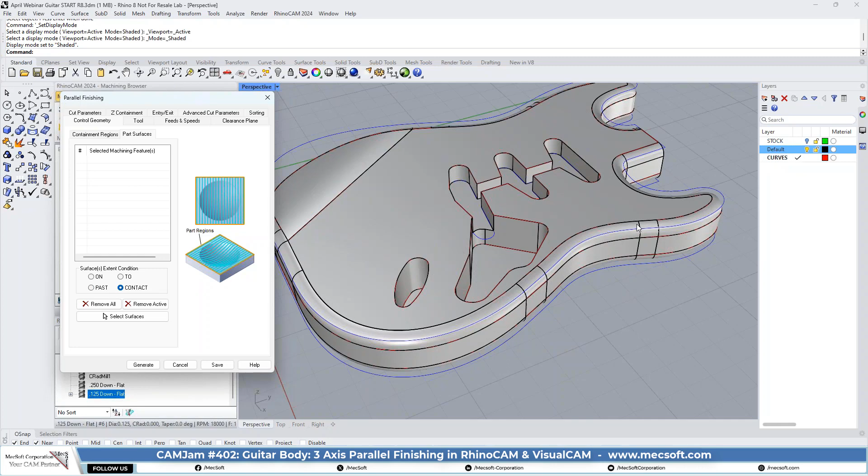This is a new option in 2024, which is going to make finishing these outer fillets a lot better. So the tool is going to actually complete this cut all the way down to the tangent line. If you recall from our previous versions, the tool in parallel finishing would stop when the tool aligned itself with this boundary, so it wouldn't go all the way down. So in this case, we have this new option that takes care of that. So we're going to use this contact condition.

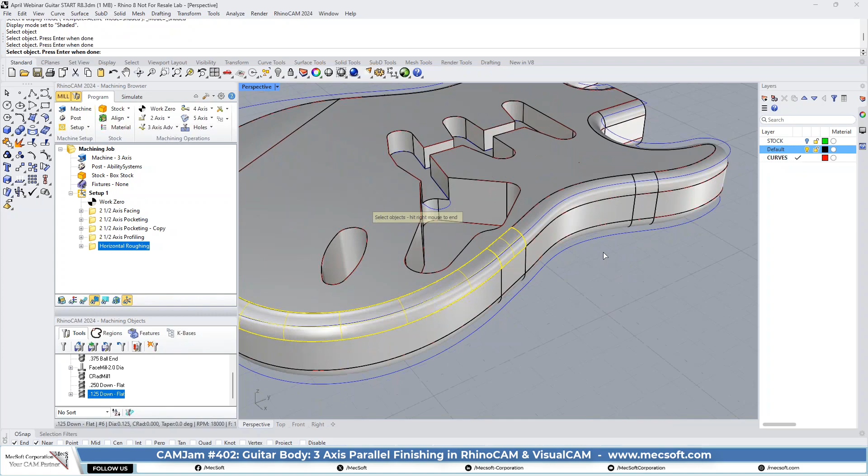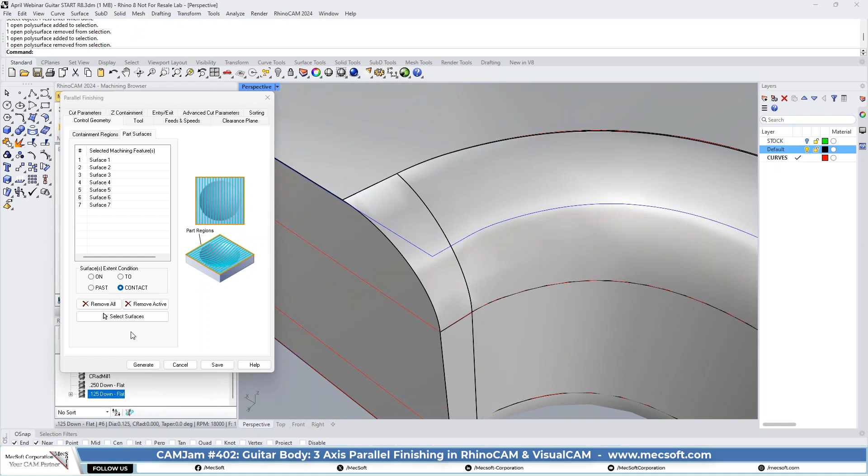We're going to go ahead and select these surfaces. We'll just start working our way around. Oh, sorry about that. Not sure why it didn't pick that. Okay, gotta keep going then. Okay, just work our way around here. And we want to do this as well. Okay, so we got all of our surfaces selected.

And for the tool, we're going to be using the 3/8 inch ball mill. And for cut parameters, 1/1000th tolerance, mixed cut direction. All these we're just going to use the default parameters. We'll use a tighter step over. We're not going to use as tight a step over as you would normally use for a good surface finish. We're just going to do a step over that makes it relatively quick to generate. So let's just put, say, 0.01.

And for the Z containment, we don't really need to do anything here. We will fit arcs. Okay, and let's generate that. It will take a little bit longer because we're calculating this contact condition around the boundaries. Normally the parallel finishing is relatively quick, but this time it's going to take a little bit longer to calculate that. And you might be able to hear the computer fan running to cool that processor.

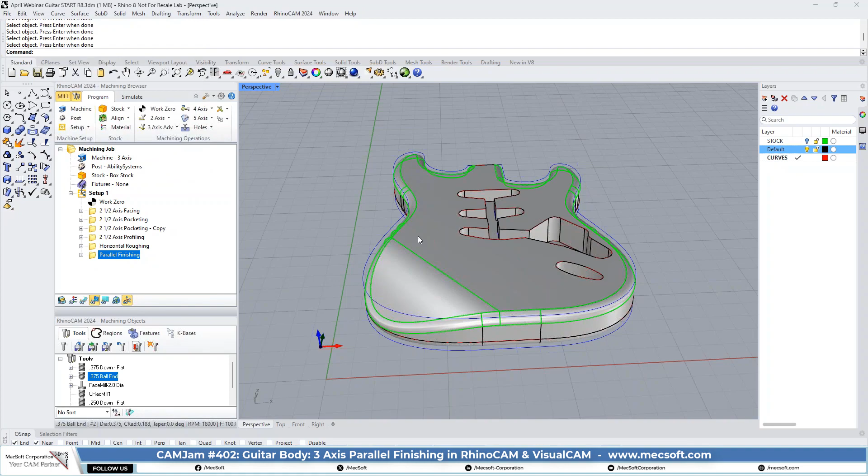So it looks like we got done here. So here is the parallel finishing. And what is really cool is that it covered the entire fillet all the way down to this contact point. So in the previous versions, the toolpath would stop when the tool was aligned vertically with this boundary, which means it didn't go all the way down.

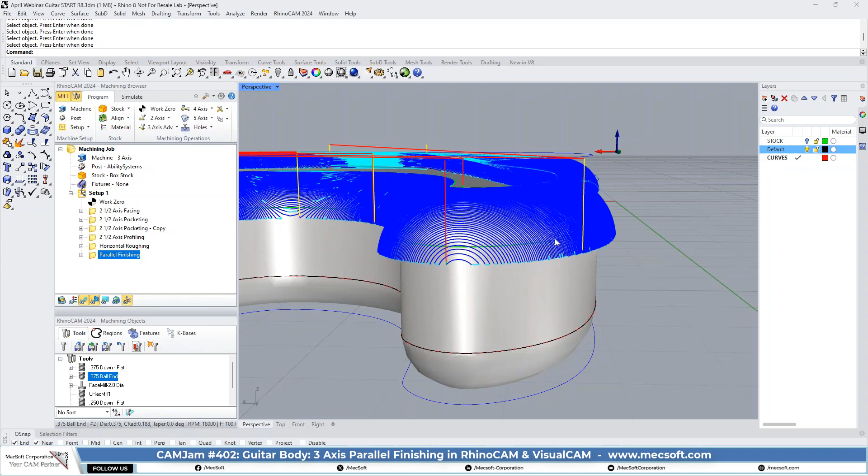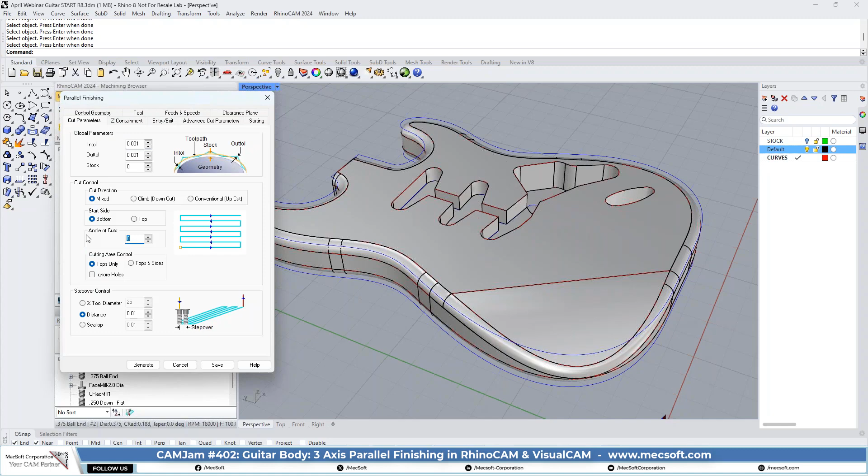So there's some other things you had to do to make it go all the way down. In 2024, you don't need to worry about that. Just use the contact condition and the toolpath will stop when the full diameter of the cutter touches this boundary. That's cool. It's always a good method to use two of the parallel finishings, one cutting in one direction and one cutting 90 degrees from that. So we're just going to clone this. We're going to go back in and all we're going to do is change the cut angle to 90 degrees and we'll generate that.

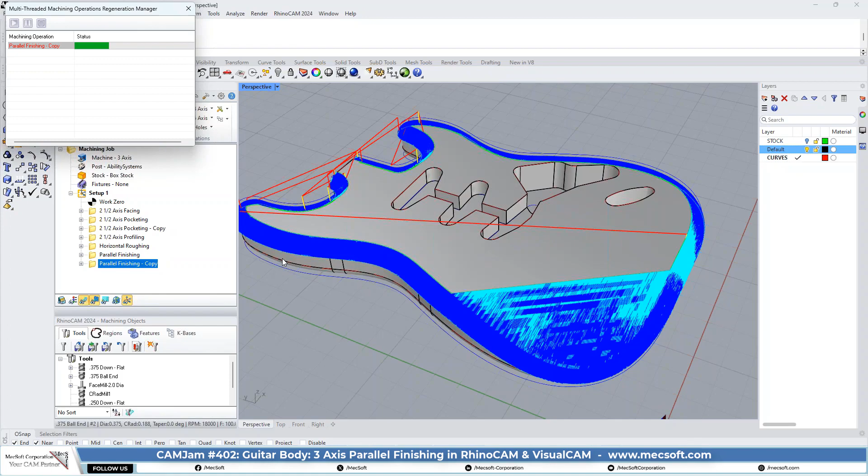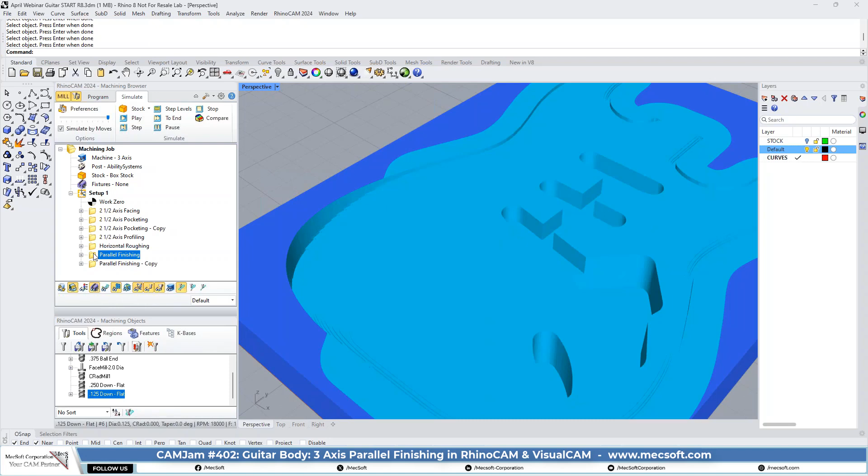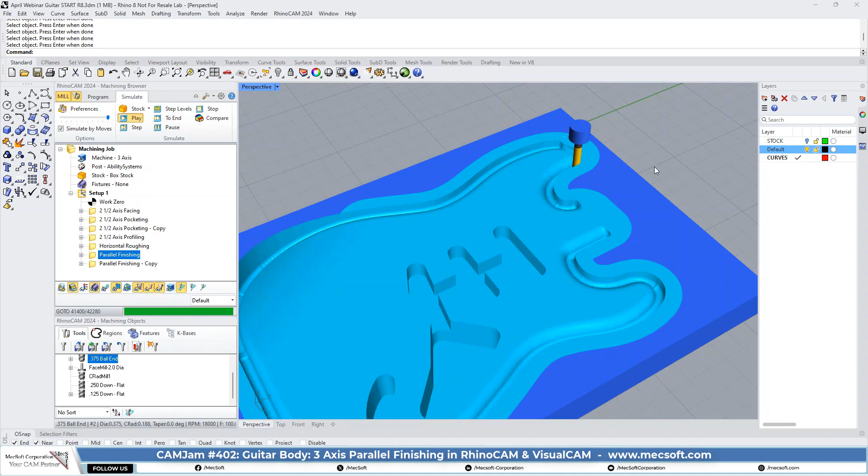Okay, so there's our parallel finishing in the 90-degree direction. Let's go ahead and simulate this. Let's turn that off. And so there's our last roughing operation. Let's go ahead and play that. So there's our parallel finishing, working its way around. Okay, so there's our parallel finishing in one direction, and we're just going to play that, and we'll just pause this and go to the end.

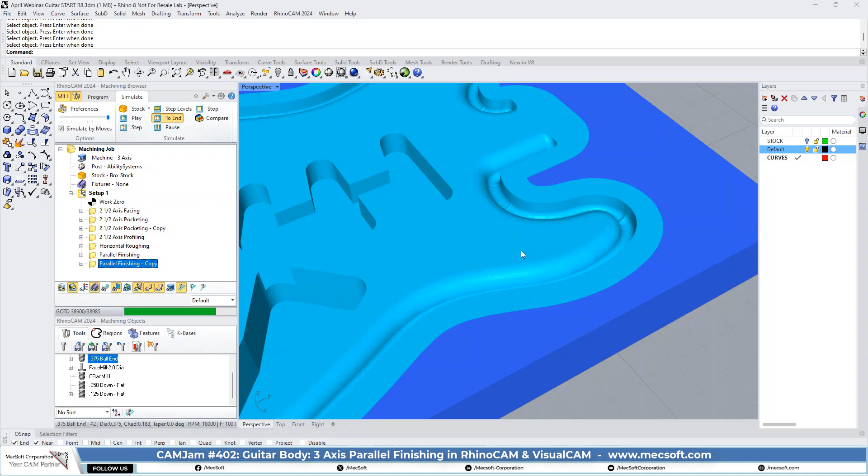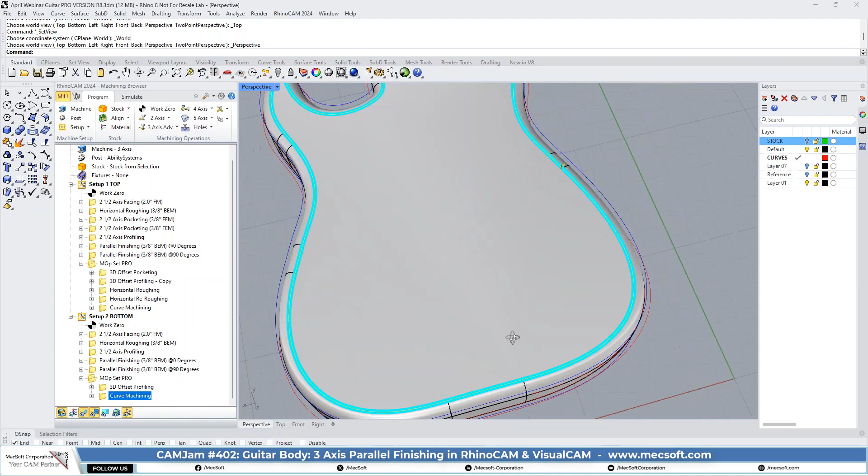Okay, so now we have the top completely finished. Okay, so now comes the interesting part, and also the curve machining as well, just to clean up the detail areas. Now in the parallel finishing, and this is in the standard configuration, I really like the fact that it calculates the boundary where to stop.

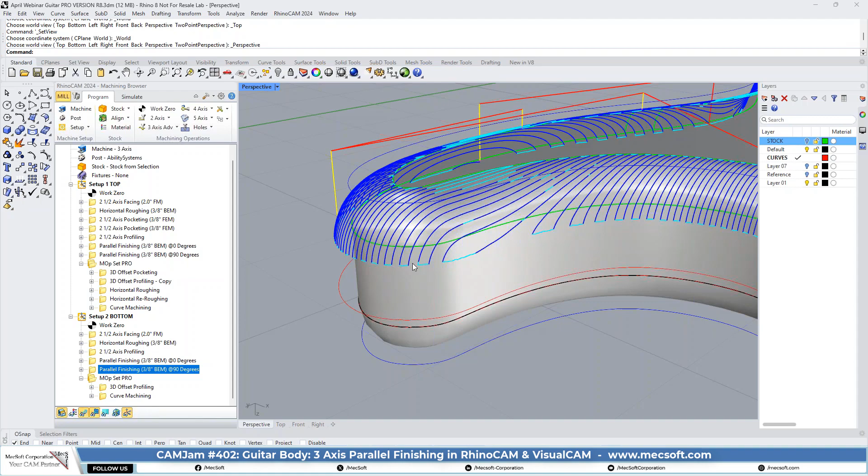If you're doing any kind of mold machining, cavity machining, you're really going to say, oh, right, I'm glad we got this. So it's really going to help out a lot. But you don't need to do that in the Pro if you don't want to.